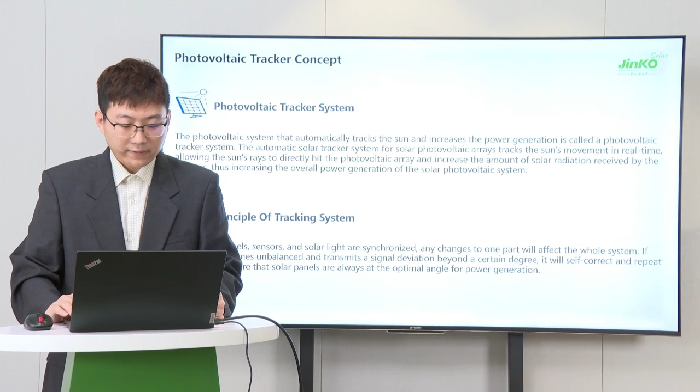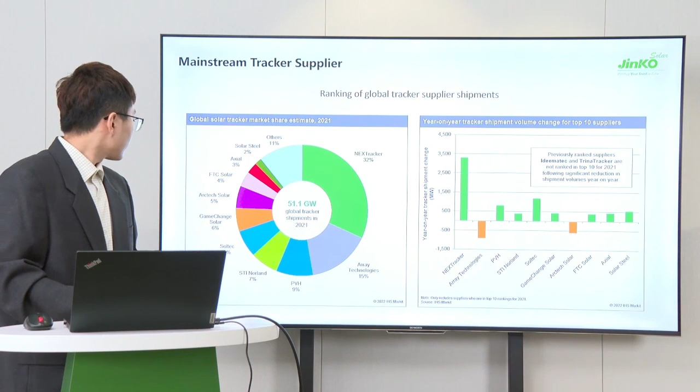So this is the ranking of the global tracker shipments in 2021. Currently, the top 10 manufacturers are NEXTracker, PVH, STI, Soltec, GameChange, Arctech, FTC, Axial, Solar Steel. And the picture on the right side is the tracker shipment volume change for the top 10 suppliers. Except for ATI and Arctech, which have some reduction, the rest are in the growth stage.

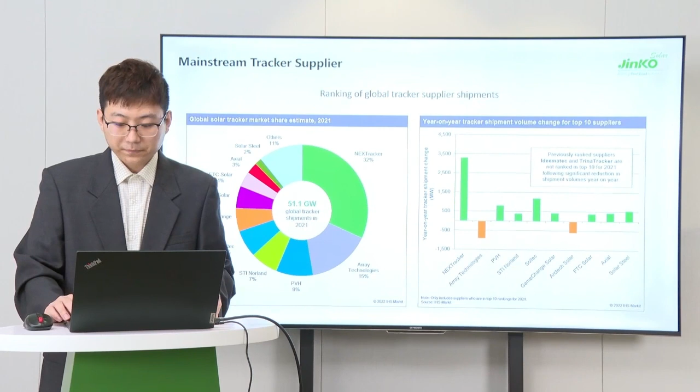Among these 10 manufacturers, these 5 companies have deep cooperation with us. Due to the time issues, this description will not be included in this presentation.

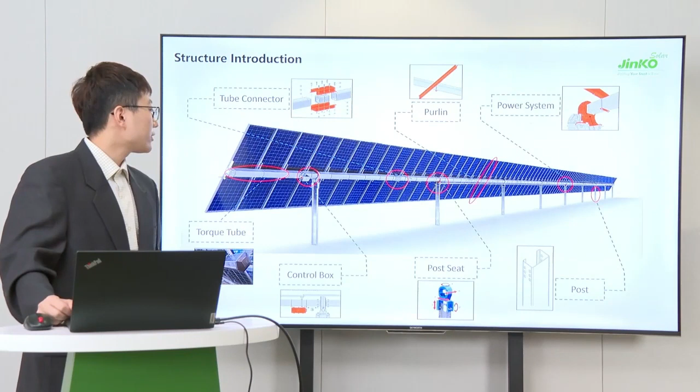And then I will briefly introduce the main structure of the tracker. It is divided into 7 parts. They are the torque tube, tube connector, purlin, power system, post seat, post, and control box.

For the tracker, the torque tube plays an important role. It is responsible for supporting and rotating the PV module. Through the torque tube and transmission device, the power generated is transmitted to the module, thereby achieving the perception and angle adjustment of the module. At the same time, the torque tube supports the purlin and connects the post.

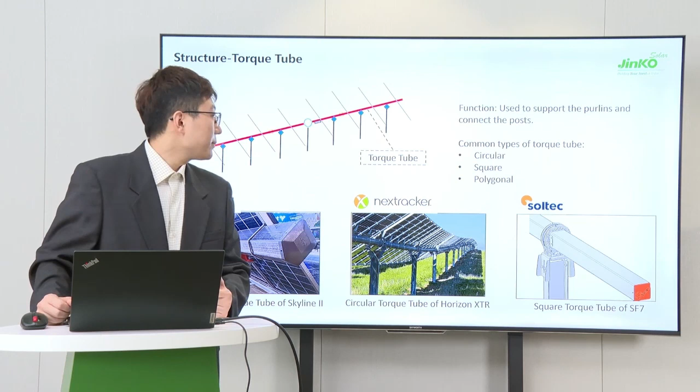Torque tubes are generally divided by shape into 3 types: circle, square, and polygon. Below are the products of 3 top 10 suppliers. The first one is the pentagon torque tube of the Skyline II. The excellent bending and torsion resistance can increase the span of the posts for this product, thereby reducing the number of posts. The second one is the circle torque tube of the Horizon XTR.

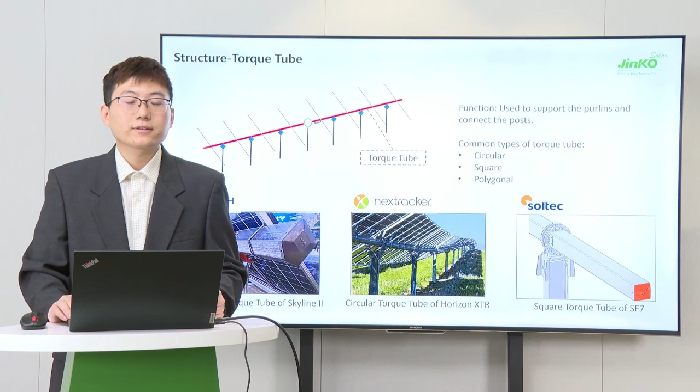The shape of the torque tube resists deformation based on this hierarchy. XTR can be installed in areas with highly undulating terrain. The final one is the square torque tube of SF7, which is the most common torque tube.

Due to transportation and packaging issues, the length of the torque tube is generally limited. So there may be several torque tubes on the tracker. Therefore, the tube connector is also very important. Its function is to connect the different torque tubes, and different manufacturers will decide according to the shape of the product.

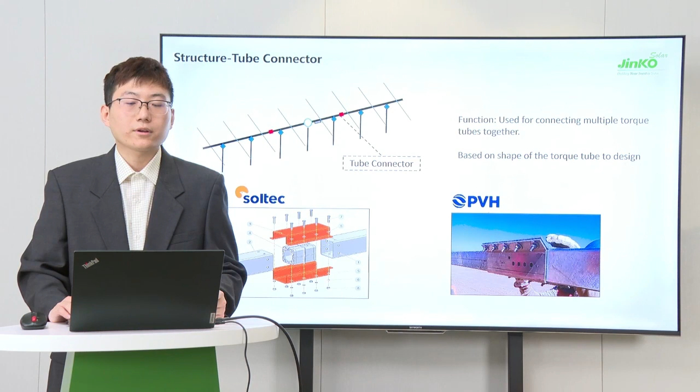The post is the supporting structure in the PV tracker, playing a role in fixing the tracker. It supports the upper structure of the tracker by being fixed on the ground or the foundation, while maintaining the stability and reliability of the whole tracker. The common types are divided into the X-type, H-type, and C-type post. According to the function, they are separated into the drive post and simple post.

The C-type post is easy to manufacture. The suppliers will always purchase the steel materials and manufacture it themselves, which has an advantage in price. The H-type post needs to be welded, so it is slightly higher in price. However, under the same thickness, the H-type post has better bending and torsion resistance. It does not easily deform during ramming. Therefore, the H-type post is generally the preferred choice in projects where the local soil is hard.

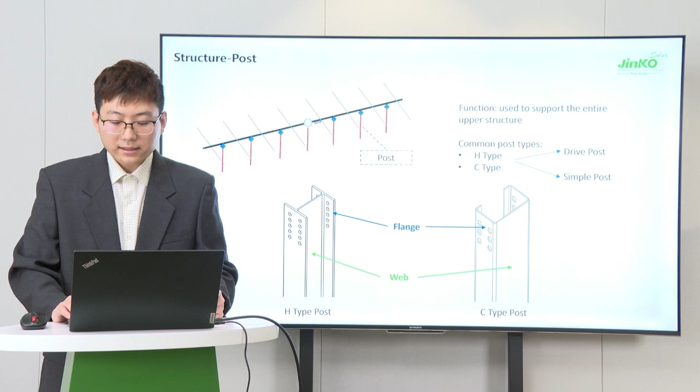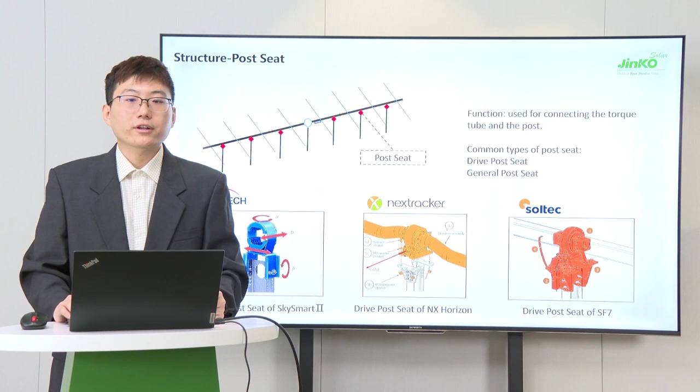The post has a web and flange plates, and the connectors are generally installed on the flange. The function of the post seat is to connect the torque tube and post. Similarly, according to the type of post, it is divided into the drive post seat and simple post seat. Different manufacturers will decide according to the shape of the post and the torque tube.

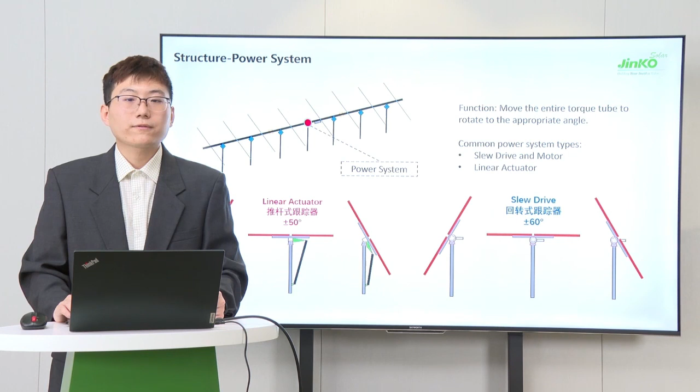The power system is used to rotate the torque tube and ensure that the components are at the optimal power generation angle. There are usually two types: the slew drive and the linear actuator. The slew drive has larger rotation angles and lower requirements for the terrain, so most companies will use the slew drive.

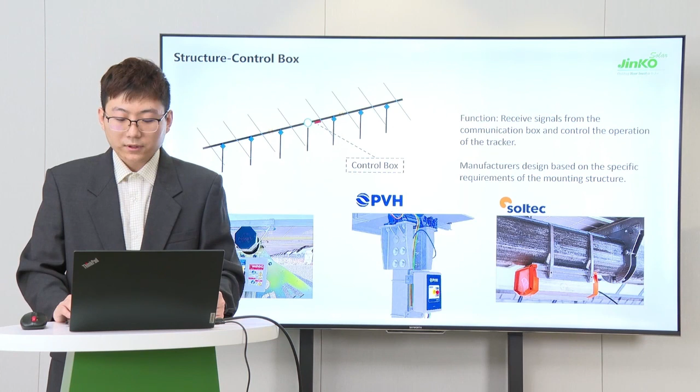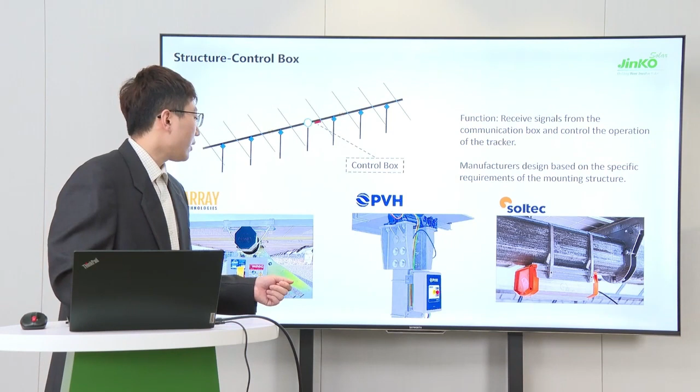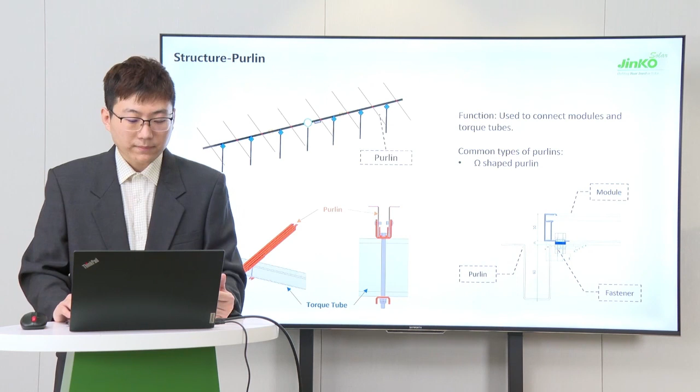The purlin is used to connect the torque tube and the module. It is also the component that affects the pressure on the modules. The normal purlin type is the omega type, and the following figure shows the manufacturer's installation method. For example, this one is from the Soltec installation manual, and the fastener used is a bolt. They use the bolt to install the purlin and torque tube.

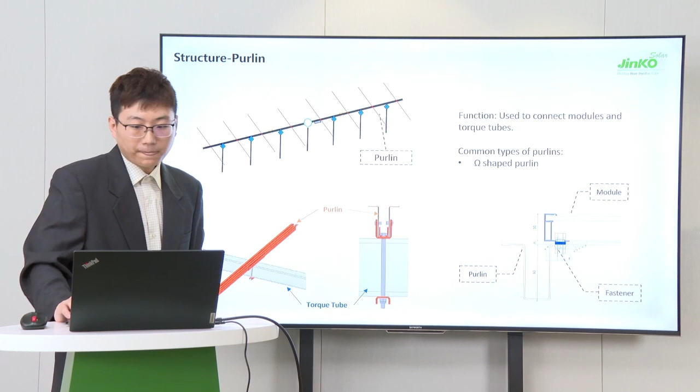So, what are the factors that affect the load capacity of the modules? The first one is the mechanical performance of the purlin, such as the thickness, material, and shape. This part should be considered by the tracker supplier. The second one is the installation method, generally including the mounting system and fastener type. If these factors are not properly decided, the module will be destroyed. For example, when the purlin length is not enough, the module will break. Also, if the fastener strength is not enough, the module will fall down.

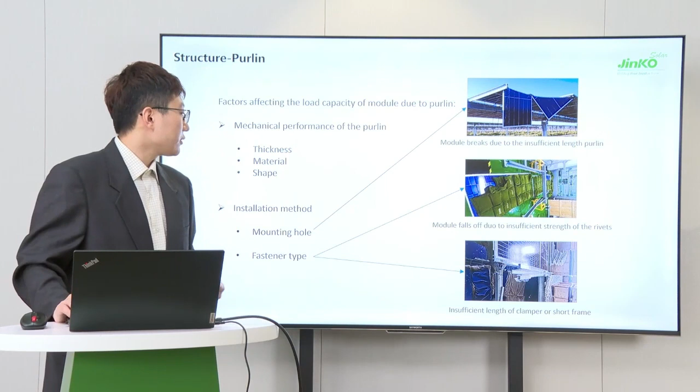Normally, there are three types of mounting hole for each kind of module. The length of the purlin determines the touch area of the module, and the larger the touch area, the smaller the force on the module. So, under high wind pressure situations, increasing the purlin length is a good solution.

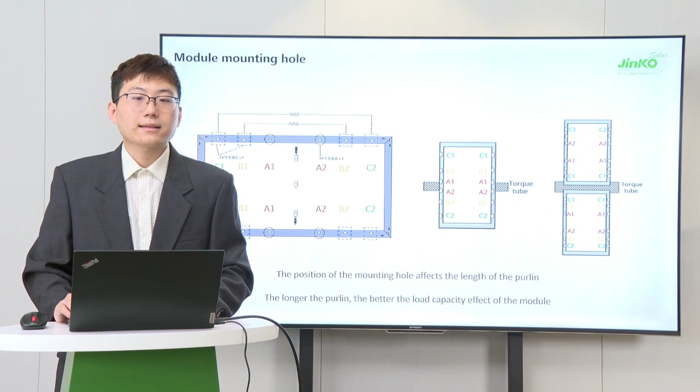There are two general types of fastener. One is the bolt, and the other one is the rivet. The connection method of the bolt is relatively simple, fixed by the screw and the nut. The connection method of the rivet is that it deforms and expands due to stress, thereby achieving the fixation. Below is a video of the installation of the rivet so you can better understand it.

So, what are the advantages and disadvantages of each type of fastener? Since rivets are generally made of aluminum and stainless steel, their anti-corrosion effect is relatively good. However, due to the material of the rivet, its strength is generally weak. Meanwhile, rivets deform during installation, so they will be destroyed after disassembly.

The advantage of the bolt is that it is very easy to install and disassemble, and there are different strength bolts to choose from. However, the anti-corrosion method of the bolt is generally galvanizing. Due to process issues, the thickness of the galvanizing cannot be too thick. So, in high corrosion environments, bolts cannot meet the anti-corrosion requirement.

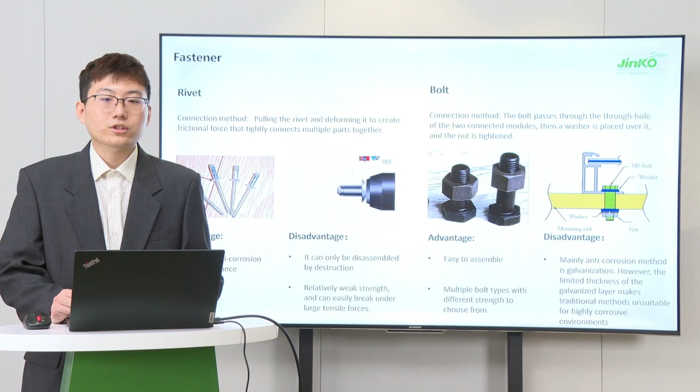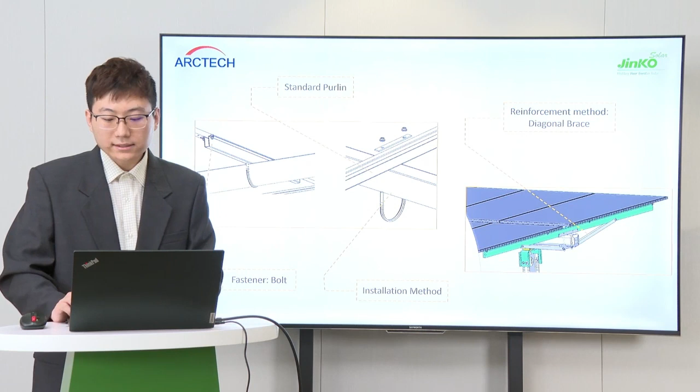The following is the purlin design of several top tracker manufacturers. This is the standard purlin from Arctech, their standard fastener is bolts, and this is the installation method. Their reinforcement method is to add a brace like this, which can increase the load capacity for downforce. ATI standard purlins are somewhat unique, and the modules are installed by clamp. The reinforcement method adopts longer purlins and bolts instead of the clamps.

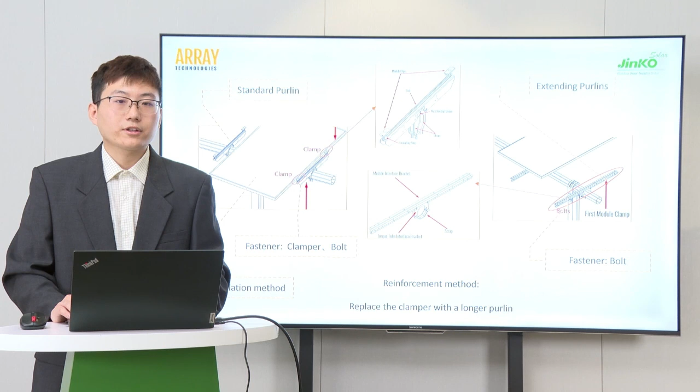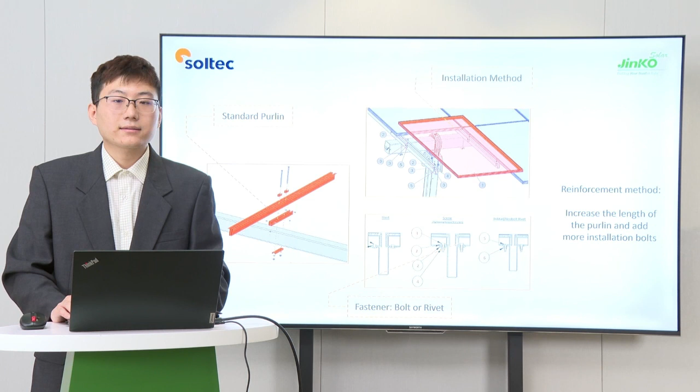Soltec purlins are similar to Arctech, but the difference is that it enhances its load capacity by increasing the number of bolts. The purlin of PVH is the most simple one. Their standard is also the omega type, and the only method they use to increase the capacity of the module is to increase the length of the purlin.

The last one is Nextracker, where the regular fasteners are rivets, and there are two ways to increase the pressure bearing. The first one is to add a supplemental rail, and the second one is to add bumpers. Based on the design situation, the bumpers can be increased to a maximum of two.

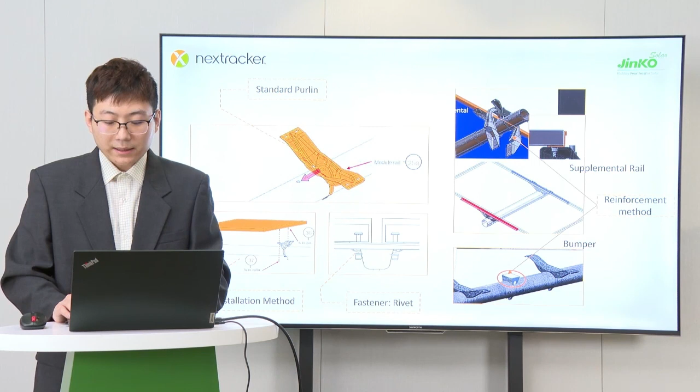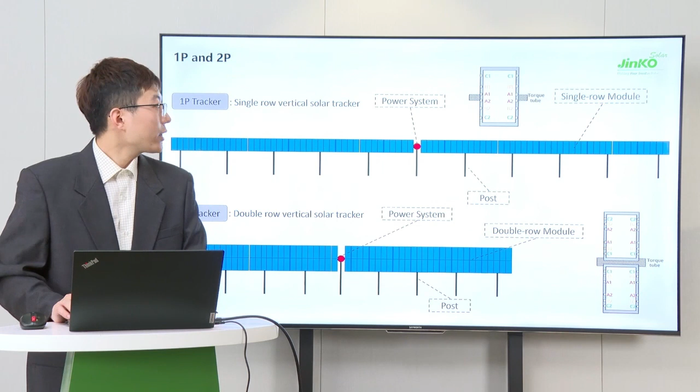After the introduction of the basic concepts of the tracker, let's talk about the types of trackers. I divide them into the following three types. The first type is the 1P and 2P trackers. The 1P tracker is the single row vertical solar tracker. This is an example. And the 2P trackers are double row vertical single-axis solar trackers. And this is the installation sample.

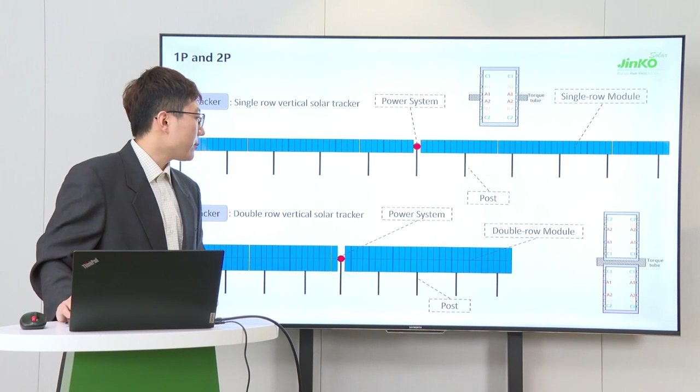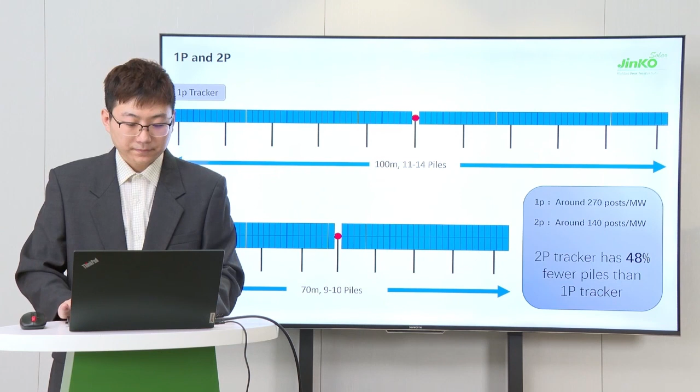The 1P tracker is generally around 100 meters and requires 11 to 14 posts, while the 2P tracker is 70 meters with 9 to 10 posts. So the 1P tracker requires around 270 posts per megawatt, while 2P trackers only require 140 posts. Compared to 1P trackers, 2P trackers have around 48% fewer posts. At the same time, since the 2P tracker length is less than the 1P tracker, it can adopt higher undulation.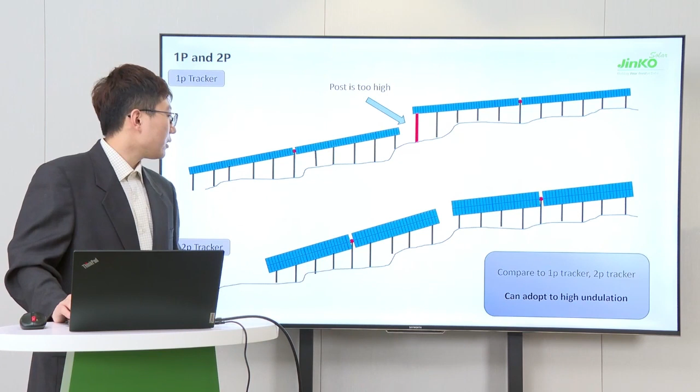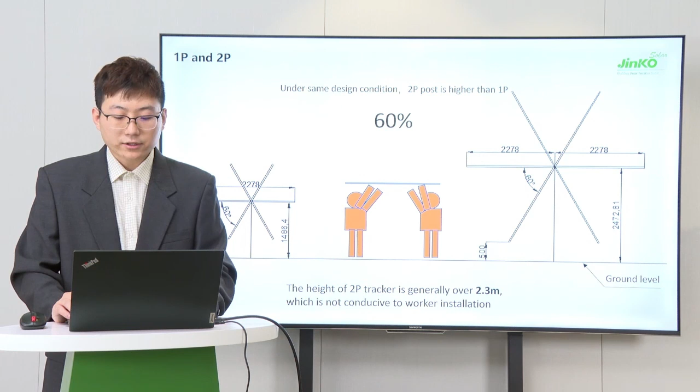And like I mentioned before, there are two rows of modules in the 2P trackers. So under the same design conditions, the height of the 2P trackers is generally much greater than the 1P trackers. The height of the 2P trackers is around 2.3 meters, which is very inconvenient for the installation workers.

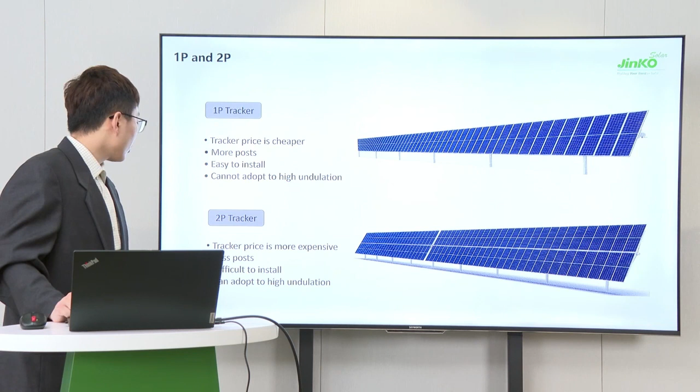To summarize, the 1P tracker's price is cheaper, but it requires more posts. It is easy to install, but it cannot adapt to higher undulation. For the 2P trackers, the price is a little bit expensive, but it only needs a few installation posts. It's very difficult to install, but it can adapt to high undulation.

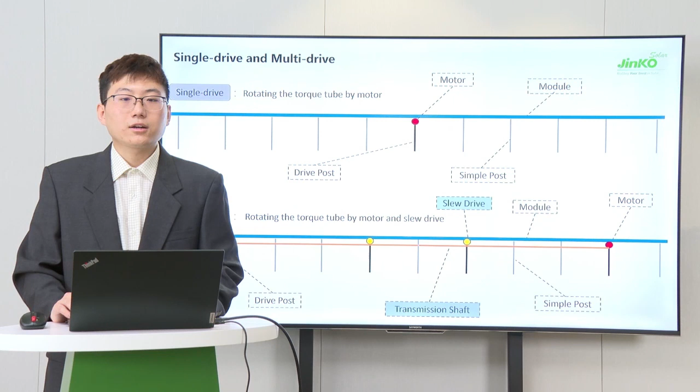The second type is the single drive and the multi-drive tracker. Single drive tracker uses a motor to drive the entire torque tube to rotate, while the multi-drive uses a motor and a slew drive to drive the torque tube to rotate. The transmission shaft is used to transmit the torsion force of the motor to the rotation. Compared to these two kinds of tracker, multi-drive trackers have additional components, which are a transmission shaft and slew drive.

For a better understanding, I will briefly explain this key component. The drive post is equipped with the motor and a slew drive. The slew drive and the motor are fixed and locked to the torque tube, and the torque tube is rotated by the motor, slew drive and transmission shaft. For the simple post, the top of this kind of post usually has the plastic bearing in the middle, and there is no connection between torque tube and this plastic bearing, which allows the torque tube to rotate freely within the bearing.

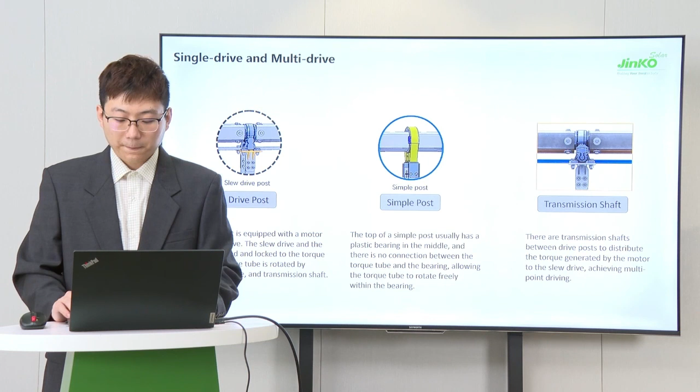And the transmission shaft is between the different drive posts to distribute the torque generated by the motor to the slew drive, achieving the multi-point driving. What is the significance of the multi-point drive? As I mentioned earlier, the slew drive and motor are completely locked with the torque tube, so they can be considered as a fixed point. In this case, the free length of the multi-drive will be much lower than the single drive.

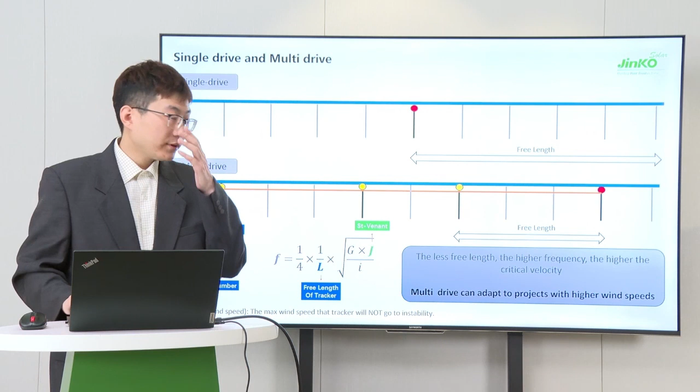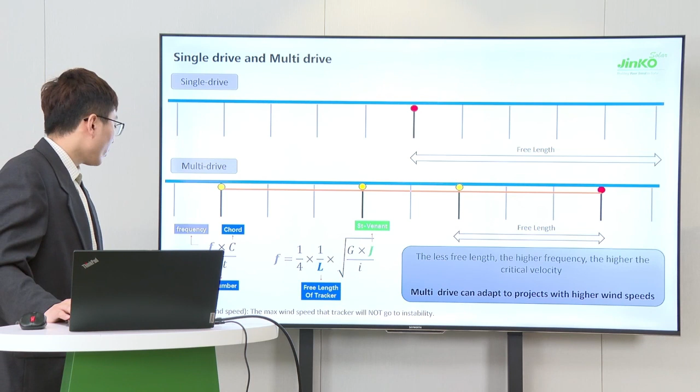From this formula, you can see when this free length is decreased, the frequency of the structure will increase. And when the frequency increases, it will increase the critical wind speed. And what is the critical wind speed? This is the max wind speed at which trackers will not go into instabilities. That means the higher the critical wind speed, the higher power generation you can achieve.

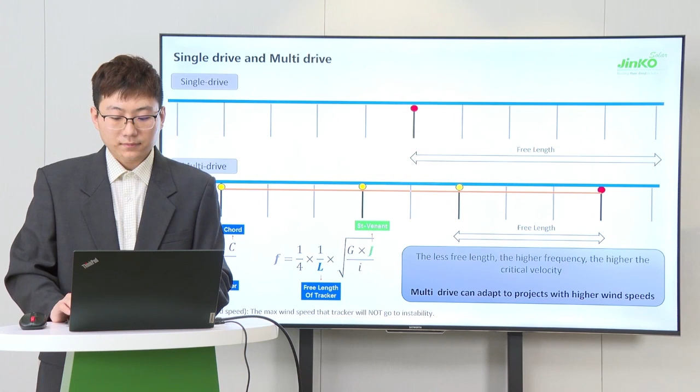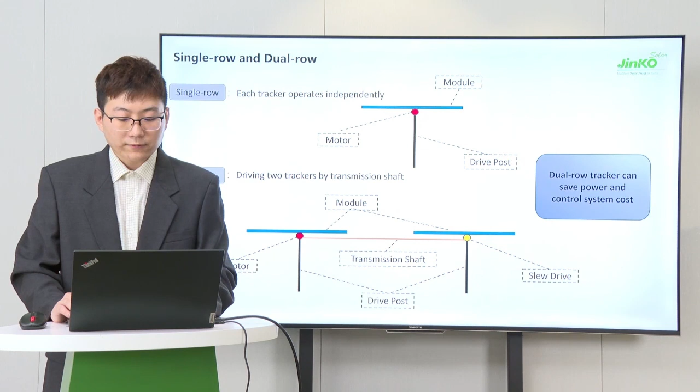To summarize, the multi-point drive is more expensive, but it can adapt to higher wind speed projects. Single drive is cheaper and more cost-effective in lower wind speed projects. The last type is the single row and the dual row. Single row is that each tracker operates independently, and dual row is driving two trackers by a transmission shaft. So the dual row trackers can reduce the price of the control box and motor.

Due to the dual row being two trackers as a whole, the rotation angle of the two trackers will remain the same, which will result in one of the trackers having the poor angle and affect the power generation. At the same time, in projects with a large east-west slope, the number of trackers will decrease and the layout design will be very difficult. So the single row design is more flexible than the dual row design.

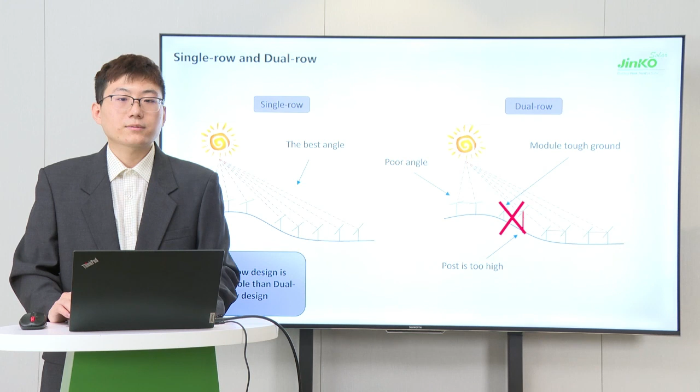To summarize, for the single row trackers, the power and control system are more expensive. However, they can achieve higher power generation and more flexible design. For the dual row trackers, the power and control system are cheaper. However, they achieve lower power generation and more design limitation.

After understanding the basic concept of the tracker, let me briefly introduce several tracker types from the manufacturers. Due to time issues, I will only introduce these 5 companies which have deep cooperation with us. They are Nextracker, Soltec, Arctech, ATI, and PVH. Nextracker has 3 products. The first one is NX Horizon. They are 1P trackers, single row with a single drive.

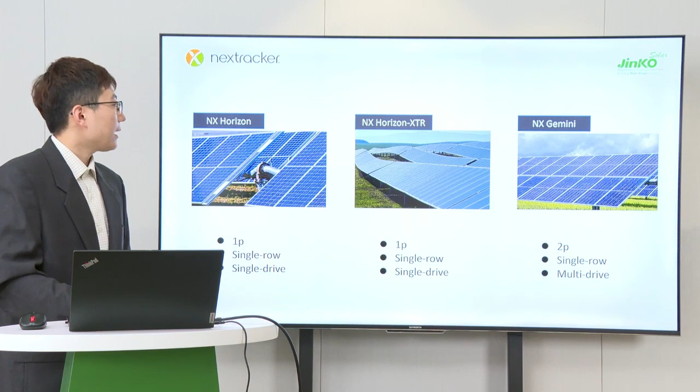And several years ago, they had an upgraded product called NX Horizon XTR. The tracker type is almost the same as the NX Horizon, but the difference is these torque tubes can deform more, which means they are suitable for higher slope projects. And the final one is NX Gemini. This is the 2P tracker, single row with the multi-drive.

Soltec also has 3 products. SF7 is the 2P tracker, single row with the single drive. And for the upgraded product, SF8 is also a 2P tracker, single row, but the difference is it changes from single drive to the multi-drive. And the last one is SF One. It is a 1P tracker, however it is a dual row with the single drive design.

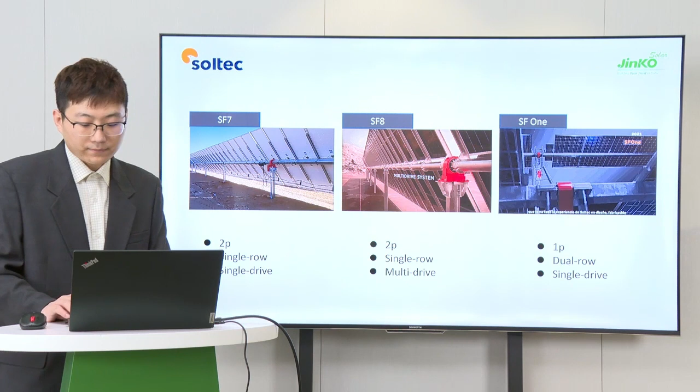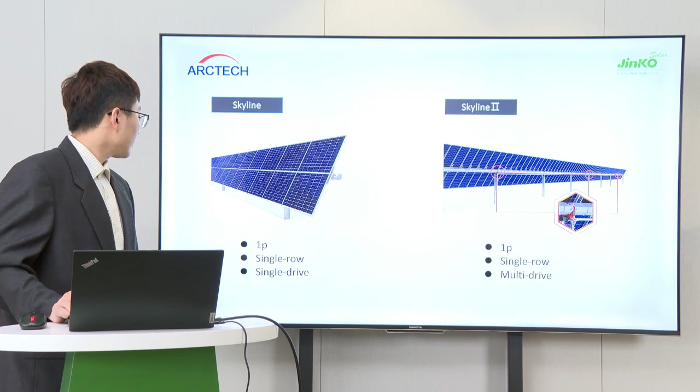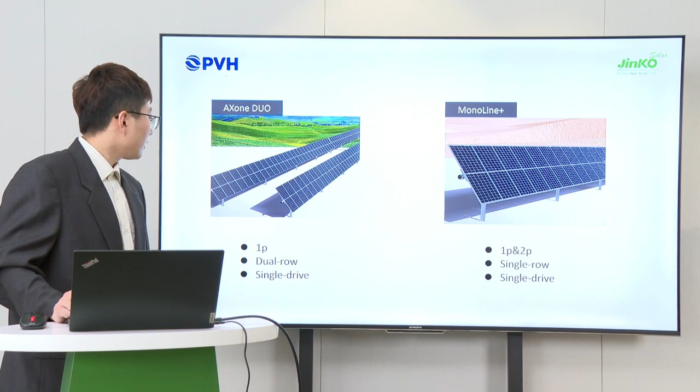ATI only has one kind of product. It's called Advanced DuraTrack, and it is the 1P tracker, dual row with the single drive. And for the last one, PVH has 2 kinds of tracker. The first one is Axone Duo. It's 1P dual row with the single drive. And the second one is Monoline Plus. It is suitable for 1P and 2P, and is also single drive with single row.

So that's all about the tracker introduction.